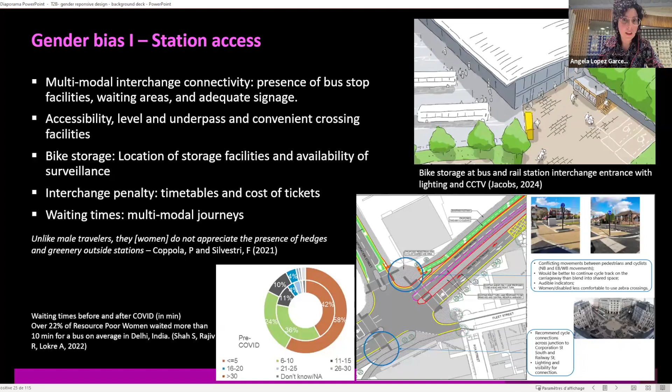Thank you, Sherin, and thank you for sharing those best practice examples. I think many of the principles will also apply inside the stations. If we go to the next slide.

So when we design stations, what we want to do is accommodate or provide enough capacity for all the passengers using the railway, and achieve efficient movement to and from trains. In concourse areas particularly, there are pressures on the space, some related to generating revenue through retail and advertising space, others through protecting revenue for train operating companies using automatic ticket gates, again taking space from passengers. This usually results in waiting areas that tend to be or could be crowded. As we said in the introduction, women experience crowding a little differently from men.

And some of the gender biases that I observed on concourse areas are precisely related to the fact that they can be crowded. To the level of comforts or the level of tolerance to crowding, we need to also add that navigating the space and wayfinding in crowded conditions is more challenging for shorter people. So again, this is a gender bias that we are perpetuating to our designs. By squeezing people into confined waiting areas, we might be marginally impacting women more negatively.

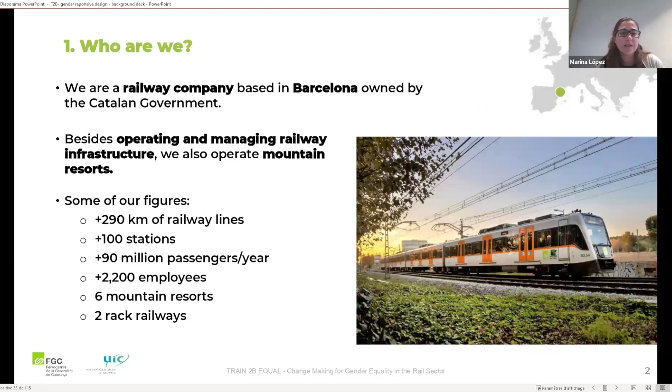I will explain a gender audit recommendation that we had in 2019. It is about security perception and recommendations for women in transport. I'm from FGC, a railway company based in Barcelona, owned by the Catalan government. We manage railway infrastructure and also mountain resorts.

We did this security audit with a gender perspective. It consisted of observations at 4 stations, 62 hours of observation, including weekdays and weekends, and all times of day: morning, afternoon, and night, covering surroundings and inside the stations. From this observation, we got recommendations based on 6 principles that I will now explain.

The first principle is about signage environment: know where you are and know where you go. This includes improvement of intermodal signaling inside and outside the stations, and also where the bike parks are, including TV information panels about other companies' transport, so you can know about all the surrounding information, not only FGC.

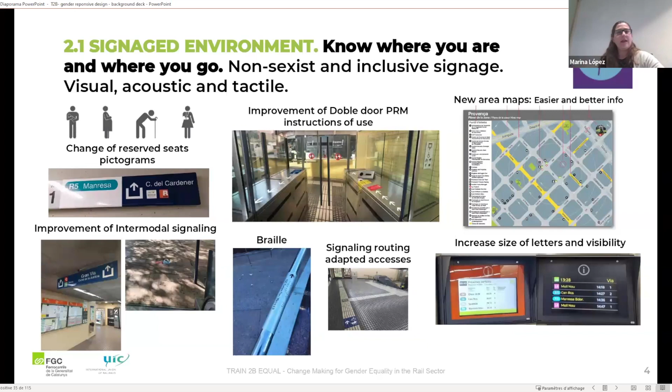The second principle is about visible environment: see and be seen. To achieve this, we need open spaces with high visibility, so you can see all the people in the station, all the equipment, and all the access points and exits. This requires transparent materials, avoiding obstacles, and reducing corners. If you cannot do this, you can put mirrors so you can see other places in the station. It's also about improving the lighting and achieving homogeneous illumination.

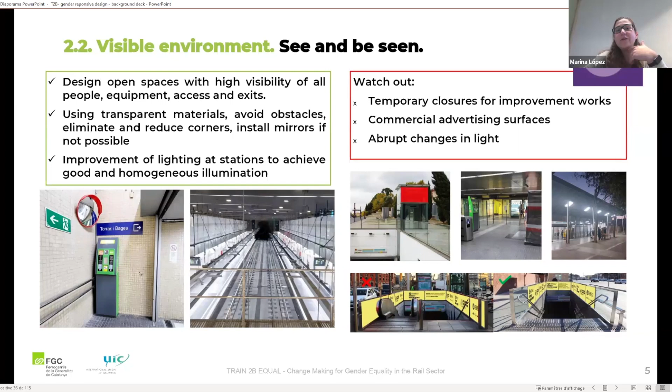Also in the stairs, you can see in the photo below — it's all about how you can make your decision. If I have transparent material and I'm in the hall and I see on the information panel that my train will pass in 10 minutes, and I see that on the platform there is only a group of men, I can choose to stay in the hall and go down later, or choose to stay on the platform. But it's my decision, so it's safer for me based on the information I have.

The third point is about a guarded environment, about formal and informal guarding, and about how I can access help or be able to escape if I'm not comfortable.

The first point was that our information points weren't visible enough, so we have a new design. Now in all points of the station, you can see them.

And from this audit, we know that it's better to train staff with gender perspective, also the security workers, because we always train our staff, but security workers were not so sensitive to this point, and now we have trained them and now they are better.

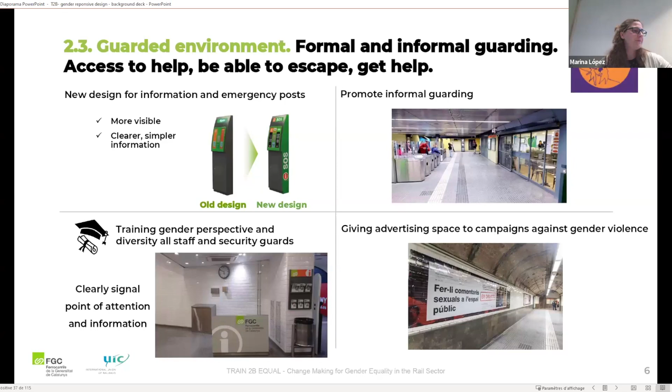The next point is about equipment. If you have more equipment, more accessible and clean and well maintained, it increases users. And if it increases users, it increases safety perception for women.

For example, we have put an auto opening button in the water closet, so they are autonomous to enter, and it is fully equipped and inclusive, unisex. It's not only for women to change the baby, all society can change the baby.

So it's important to put this in the station, to put in the mind of the society that it is not only for women.

Also double height handrails, so all people can use them. And an important thing that we didn't mind about before is that benches would be better if they have armrests, so all people can stand up easily and autonomously.

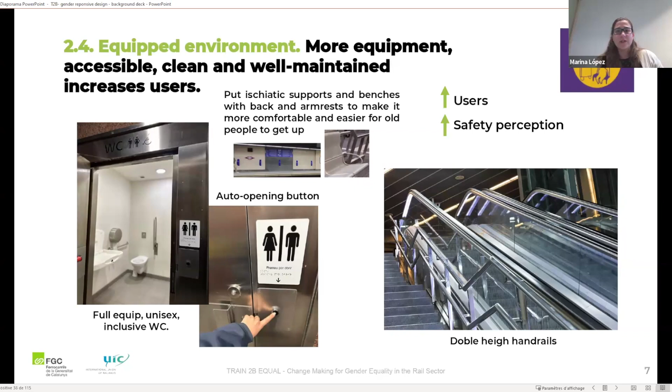The 2 last ones are together because both are of the same importance, they are always together. It's about listen and be heard. If I go to a crowded place or a place with more people, not only me, if I need something, I will be listened to. I will be heard.

So promote vital spaces with people and space appropriation. It would increment the vitality, and it would increment the access to help. So it would increment the safety perception of women.

And we have expositions in the hall of the stations. Also another important thing is giving advertising space to civic awareness campaigns, so it will promote special space care and space appropriation. So more vitality, more people, more help, more safety perception.

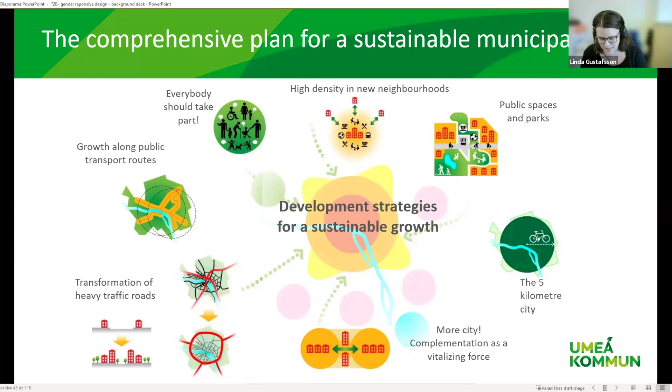I wanted to start with this one though, since I work for the municipality, and from the standpoint of the city, these are the development strategies for the city of Umeå, and one of them up in the left corner says that everyone should take part, and then continues that gender equality should be part of all urban planning. So that's also one of the starting points when working with gender equality in relation to urban planning and public space. I think that I will dive straight into the practical examples, so you can take the next slide.

I also want to mention the data sets we focus on when we talk about public space and station buildings, in this case in the city of Umeå. We have data sets on the gender segregated labor market, travel habit surveys, and also data on feelings of unsafety in public space.

We know that the hospital is a workplace that employs a large amount of women. And we know that in Umeå women travel more sustainably than men, so they use public transportation, and they also ride their bikes and walk to quite a high extent.

When this was to be built, there was dialogue, and I think that dialogue and citizen participation is key in talking about these types of constructions and buildings.

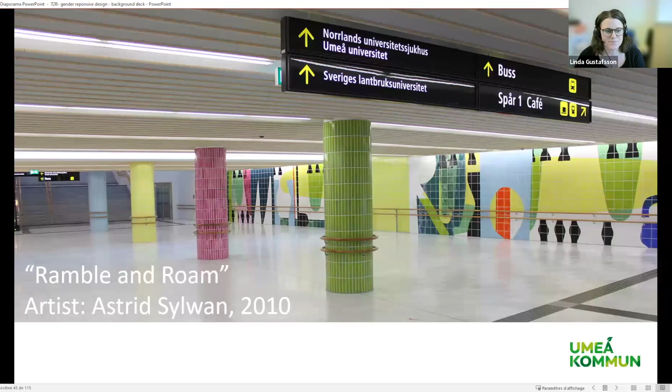So that was my first example, and we can move on to the next one, which is the passage under the Umeå Central Railway Station.

This was commissioned by the City of Umeå together with the Swedish Transport Administration Agency, and this was built in 2012. When this was to be built, there were all sorts of stakeholders involved in this process.

They did workshops together and a study visit where they walked through different tunnels to assess what makes it feel more safe, what makes it feel less safe, what makes it feel more or less accessible. So it was the actual building of the passage or tunnel, but also the surrounding areas, greenery, lighting, housing, how close or far away they are, and how that makes us feel.

We also received funding from the Swedish National Board of Housing, Building and Planning to improve our methods for working with gender equality in this type of construction.

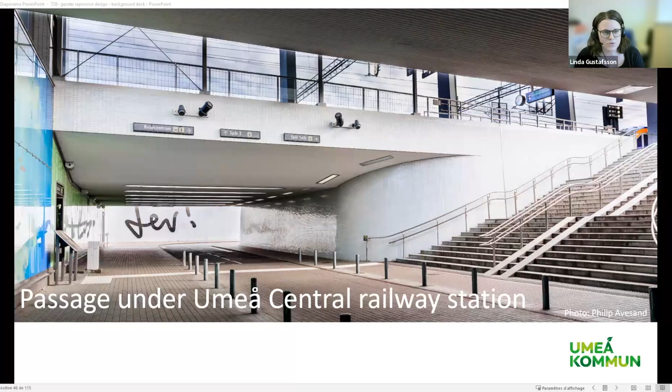We can go to the next slide to showcase what was actually made or integrated into the building process after this workshop and common learning between the different stakeholders. And I think if you click one more time.

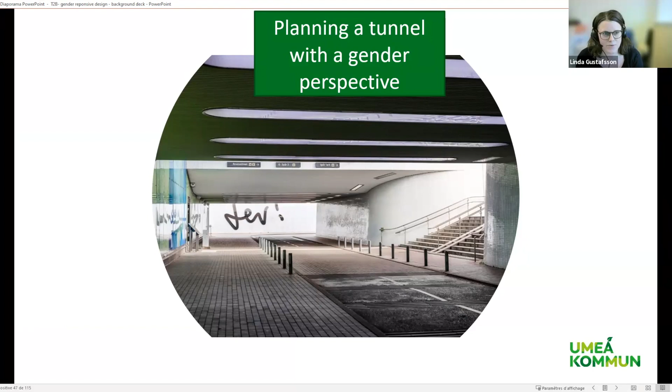So this is one of the things: the lighting in the roof is artificial lighting, but there was an ambition to make it resemble daylight as much as possible. And on the right, you can see an exit in the middle of the tunnel, which is also there to allow daylight, but also to have an extra exit.

This wasn't planned from the beginning. It was added when working actively with gender equality, so that you would have a way out of the passage if it started to feel, for some reason, unsafe. The passage is quite broad, but it's not as wide as you might think.

I think it's 9 or 10 meters, and there are designated lines for bikers and walkers. All the corners in this passage are rounded, so there are no sharp corners, and that's also to avoid the feeling that someone might be hiding, or that you don't have full visibility when you go through it.

There are no pillars in the middle, for example. I think this is important to remember when working with gender equality in these types of constructions: it's also the choices not made—that you decide not to have pillars, that you decide not to have something. It's not only what's added, it's what's not added, so to say.

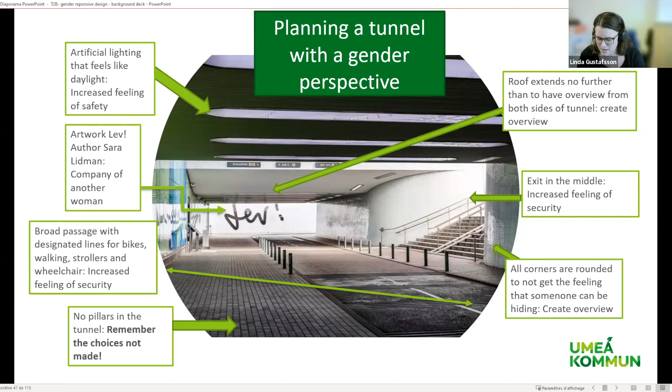But then another important thing, I think, in this particular example—if you go to the next slide—is the artwork in the passage. You saw some of it on the previous slide, where you saw a quote that says 'lev' with an exclamation point, meaning 'live' in Swedish. That's part of the artwork, a 170-meter-long glass artwork made of quotes picked by the citizens of Umeå from an author called Sara Lidman.

She is from the county of Västerbotten, which Umeå is in. The artwork is both light and sound and quotes, and the quotes were picked by citizens of Umeå, picking their favorite quotes from her books and voting. Having this interaction and participation, I think, is important because it creates a feeling of belonging—this is a passage or tunnel that belongs to the citizens of Umeå, who have been part of creating it.

So you also have the company of another woman, even though she's not in physical form—she's in the form of quotes, and her voice that you can listen to. I think that also increases the feeling of safety when you pass through it.

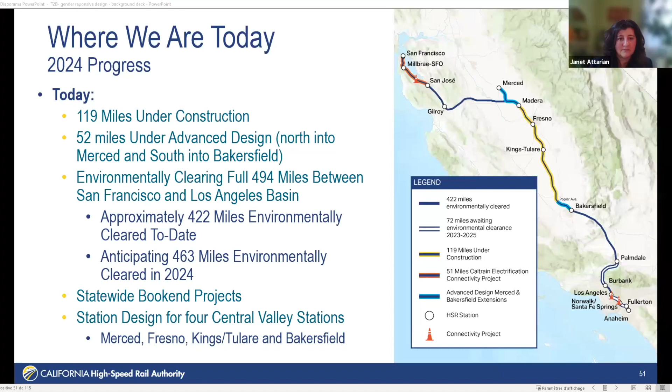In doing all of this work, we are producing a lot of jobs in the construction and design industry right now. This is really important, and one of the reasons the project is starting in the Central Valley is because we wanted to make sure this project was improving the lives of Californians and providing jobs to the community. There's been a big focus on hiring local folks, particularly small businesses, and I'll talk about how that's affecting women in particular.

There's a real emphasis on how this project will achieve California's overall sustainability goals, and there are some very aggressive sustainability goals on this project, which I'm going to talk about a little later in terms of how that translates into supporting women.

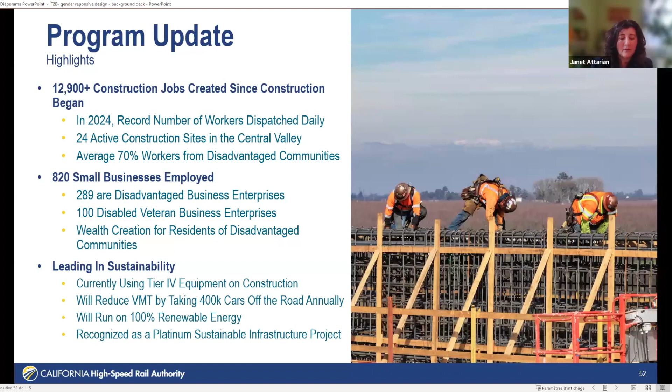As I mentioned, we are starting with the design of these 4 stations. There is work going on in some stations outside of this area, but they are still a little ways off. We hope to have this first 171 miles up and running by 2030, so we are actively working on the design of these stations so they can get built in time for this section of the system to be up and running.

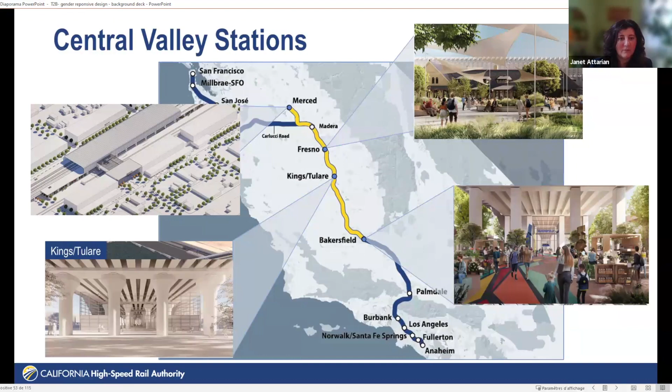I'm going to dial in now on what we're doing when we're in the planning and design stage of this whole system from scratch, which is a unique opportunity, and how we're thinking about gender inclusive design from the beginning, and how this kind of project can improve the quality of life for women. I already mentioned job opportunities, obviously how we're designing with gender inclusivity in mind with specifics around the train and stations themselves, and also how we're thinking about the importance of not just the station, but the community that station is in, and how these things come together.

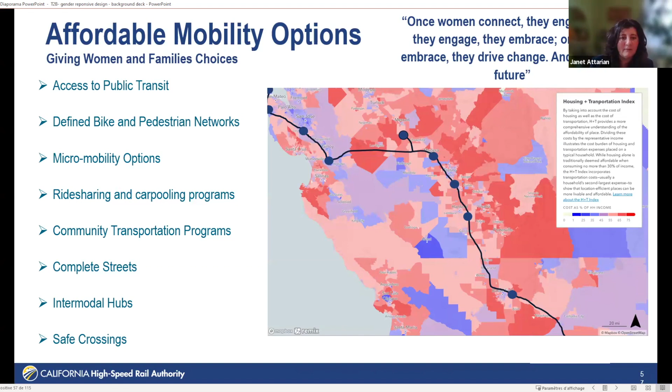The other thing that's really important is that we are still in the design and planning stages of this system. The first part will hopefully be open around 2030. But there's a lot of efforts going on right now that are impacting riders and women in the system and in the state of California, even before the larger high-speed rail system is up and running.

In the Valley, we are really working with all of the transit providers. High-speed rail is becoming the new backbone for a real overhaul of California's public transit system, bringing it into the 21st century. The authority is helping electrify bus fleets. There's new and revised train service being developed to tie into all these stations. Every station is getting some form of new transit hub.

There's EV bus charging and vehicle charging being integrated throughout the system. Many of these projects are already underway or getting started and will be up and running before high-speed rail. There are also big efforts in the northern and southern pieces, electrifying existing track systems that high-speed rail will come in on, and addressing blockages that happen now, so the whole system can really function when high-speed rail comes on. This has been really exciting, and something a lot of people from the outside don't always understand: high-speed rail in California is so much more than just the train system. It's really a rethinking of public transit and getting to those seamless interconnections, which are so important to women.

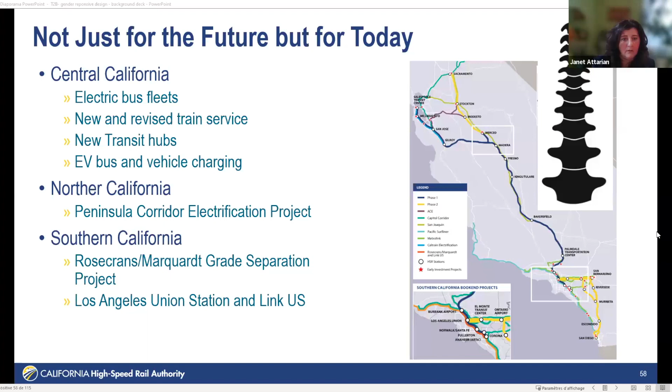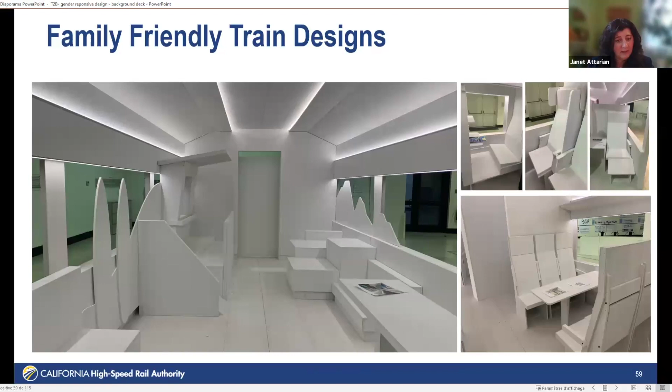We're also looking at a range of seat types, from some very private cubicles to more typical seating. The width gives us the ability to create pods so that larger family groups can sit together. Having that range of options is really important to women, whether they're a single woman alone who wants a little bit of privacy, or a woman traveling with a large family needing to keep everyone close.

And then the designs of the stations themselves - there's a lot of really key things that we're looking at. Having our entrances very visible, making vertical circulation very visible with exterior stairs and escalators. When we're looking at platform designs, really minimizing intrusion, so there's clear sight lines, you can see who's on that platform. There aren't hidden corners. Wraparound services, creating retail forecourts and multimodal connections.

In the case of the Fresno station, that vertical circulation you're seeing not only leads you to the station, but it is a continuous bridge across the station that actually connects communities separated by the railroad tracks. Again, really important for women, that they don't have to go around a long way or under the underpasses to get from one side to the other. There's a well lit, well secured circulation path which everyone needs to move through, whether you're going into the station or just crossing over to the other side of the community.

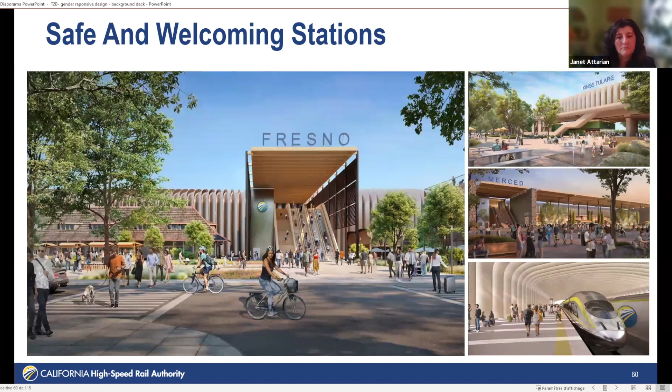Smith Group did a study where we really tried to understand what people were looking for in gender inclusive restroom design, lactation facilities, and did a lot of work interviewing people and doing surveys to understand what they were looking for. There were four key things that came up that we're working to apply not only to restroom design, but throughout the design.

None of these are surprises - we've heard a lot of this earlier today. Easy to find and navigate, right? It's got to be clear and super intuitive, and the layouts have to feel really welcoming. The ergonomic side prioritizes well-being, accessibility and convenience. It goes beyond just, can I find it? But when I get there, are things arranged in a way that really supports the needs?

And then the cultural aspect is really important - how is it fostering a sense of belonging and respect? That really makes a difference, when the design is telling you that you are respected, you're going to feel much more comfortable and much more welcomed. And then, of course, access - really preventing spaces that feel exclusive, and making sure we're focused on how we're providing safety.

Next slide. So how does this translate in what we're doing in terms of design?

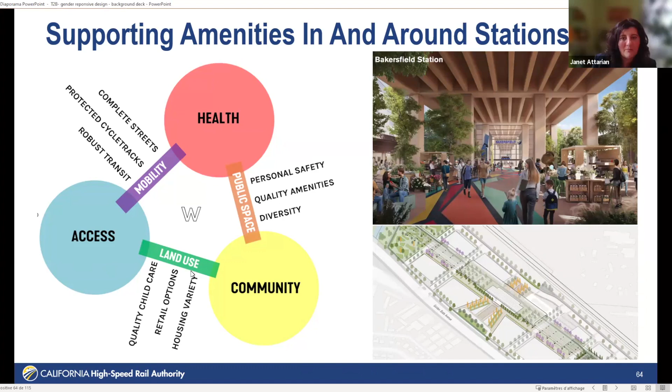Yes, here we go. So the final thing I want to talk about is that we're also harkening back to those sustainability goals. These stations are going to be so much more than just a place you come to get on and off the train—they are also resiliency hubs for the community.

The entire high-speed rail system will be electric. It will all be green power, and it will be locally generated. As part of the build-out of the system, we're building PV fields all along the system, which will feed not only the track and train system, but the stations themselves. This allows for a lot of resiliency—these stations should be able to operate even in times of crisis when the grid goes down.

California is subject to wildfires, earthquakes, and tremendous heat stress in the valley in particular. So they can serve as cooling stations, refuge areas, and provide power even when the larger systems may be down. Another important part of this is they can provide community connections and access to services in times of need.

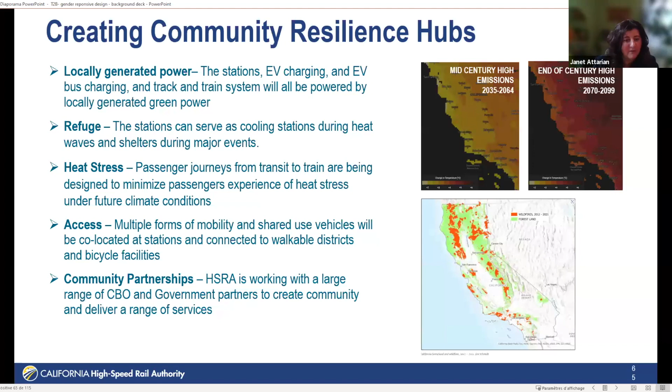One of the ways the authority is really doing this, not only to help with this community and long-term resiliency, but also in the immediate design of the station, is by partnering with local community-based organizations.

Recently we had a series of public engagement meetings with community organizations throughout the valley—one for every station area we're building. We met with hundreds of CBOs and asked how they see partnering with high-speed rail, and what they're interested in bringing to their community to reflect its needs.

Even before the stations are built, we're doing what we call early partnerships. In Fresno, we're building a public plaza, restoring the historic station that was there, and building a multimodal hub with a lot of EV charging. There's a whole series of partnerships, from tree planting to food markets to murals, all being done with high-speed rail.

This is really building partnerships with the community that will not only make successful stations, but bring supportive services that are so important to women, and hopefully make people feel more comfortable using these stations and getting used to coming to these spaces well before the stations themselves are open.

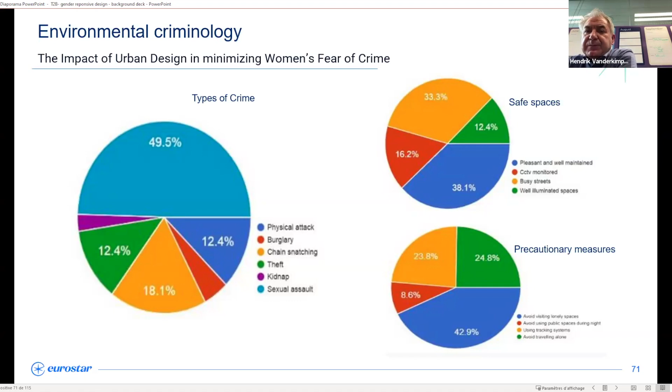Concerning design, I saw already in a lot of presentations before that environmental criminology has also been used to deal with approaches for railway systems and urban public transport systems, introducing CPTED - crime prevention through environmental design - into the approach of building stations, the environmental approach, etc.

Professor Cozens is one of the people dealing with this since 2008, though I think since the 90s, but in 2008 we had the first approach for public spaces, in which we can define CPTED as identifying conditions of the physical and social environment that provide opportunities for criminality, and then modifying those conditions in order to reduce the opportunities.

It's very important that we try to mitigate the possibility of increasing crime, or conditions of physical assault, opportunities for criminality such as vandalism and theft, by mitigating these criminal facts together with approaching the environmental aspects of buildings, stations, trains, and so on, as I saw in several approaches today.

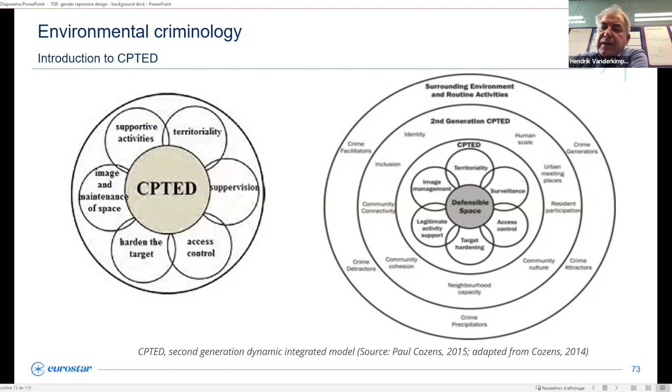We started in the 70s with CPTED on territoriality, access control, and supervision - a very hard way to deal with it. In the second generation of CPTED, there was already an aspect of community, an aspect of human scale, and so on, leading to today. The first generation covered territoriality, natural surveillance, image and milieu, and access control. I find a lot of examples in the Belgian railways.

Maybe you can go on.

We have to define and limit in time and space that public spaces are clear for everyone. Everyone should know that they are in a public space or public environment, such as public transport, and that intruders can easily be identified.

That's why in Belgium we have a free number for appealing to Securail, not the police, but Securail, so that every time there is a problem with incivilities, people can intervene as soon as possible.

We also need supervision, and the best practices are the presence and visibility of staff and CCTV. Women and men and other people should know that they can always be helped and seconded by security staff. Okay, next slide please.

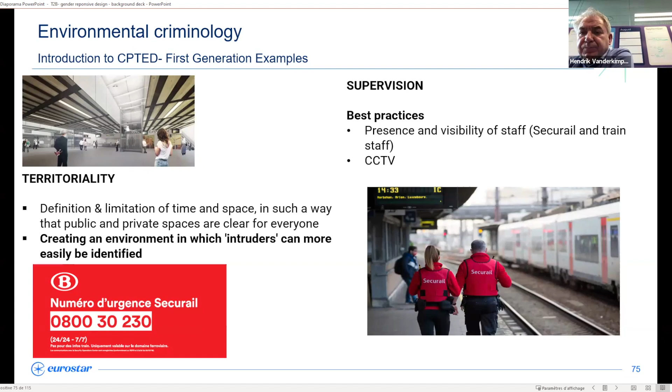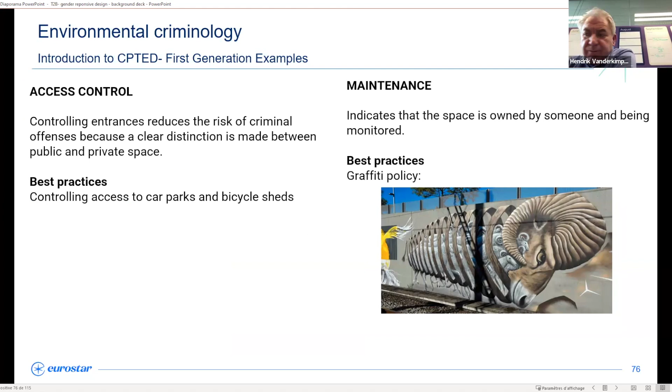For the access control, you can see that the entrances of bike parks and car parks should be controlled so that they reduce the risk of criminal offenses.

Here again, there is a clear distinction between public and private space. Maintenance is the fourth example aspect of CPTED first generation: to tell everybody using the public space that the public space is being monitored.

For example, we use an art graffiti policy, not a policy where everybody can put graffiti on our walls and stations, but we use very good artists to create art graffiti projects in a lot of stations in Belgium.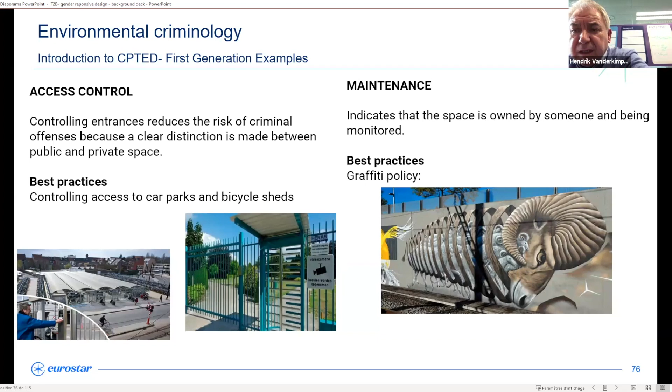Next slide please. Supportive activities, of course, like live performances in the stations, as we saw already in, I think it was Barcelona. The piano is there again.

I saw the same examples in one of the first presentations this afternoon, about studying the wider embedding of station buildings in the environment, and also the accessibility of the stations into the urban space.

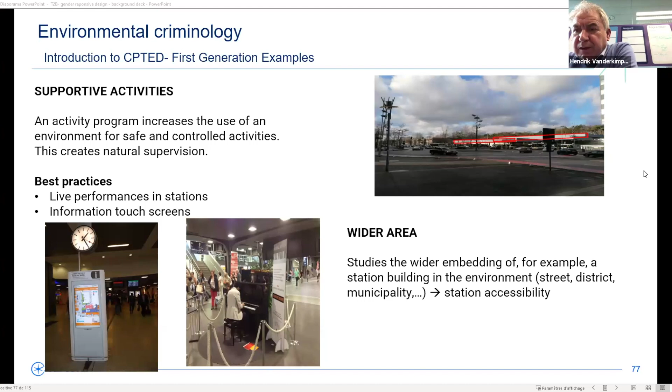Next slide. Just be careful, Hendrik, because we have a limited time now. Yeah, I think there are a few slides left. I will pause this one. Thank you. This one, yeah, can pass.

This one too. For the second generation, maybe that's important, because I heard also from our colleagues that social cohesion is very important within a community, and public transport should also be considered a community in which people of different cultures and backgrounds come together with different objectives - taking a train, taking a bus, but also coming to the shops and the station.

There also should be community connectivity, which is very important. As we see, for example, the last example in 2024 with a big problem around and in the station of Brussels Midi, there was a collaboration between police forces, social forces, social environmental organizations, and the railways together to approach the station, because we cannot do it ourselves. So we need this community connectivity.

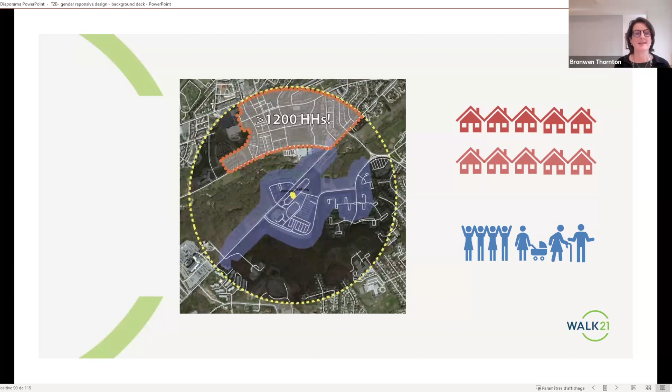Next one, please. So I want to talk a little bit, we've heard a lot about women's experience. We've just done this fantastic project in Milan called Step Up. It's a really great little brochure and a great project. I'm really sorry I haven't put the web address there, but you can look it up online, understanding how women feel walking in Milan.

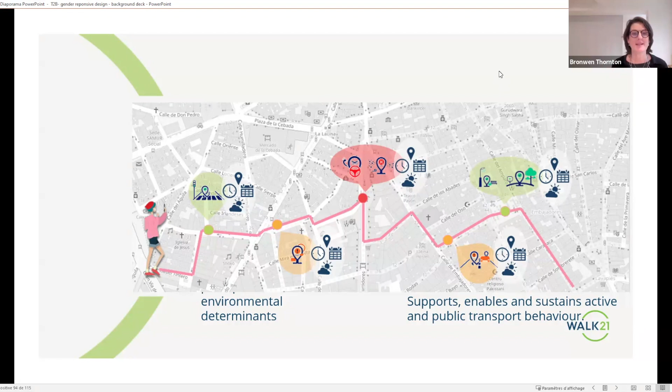Next slide, please. So this is a really quick summary of what the app does. I've mentioned most of those things, but the importance is that it's like a satisfaction survey from your walkers, but incorporating that catchment journey to the station. And it allows you to establish a baseline and then go back and measure the impact and evaluate those improvements.

We saw that in the chat earlier in this conversation, people asking, how do you know if it's worked? How do you know if it's made a difference? Do women feel better about it? This app can help you do that, because that's exactly what it's doing, not just measuring the environmental changes, but

the impact on how women feel and how comfortable they are. Next slide, please. And that brings me to my final slide, which is to invite you to join us in Lisbon to continue talking about people, about public space, about gender, and about access to trains, rails, buses, the whole entire journey, and how walkability is part of that conversation.

We're in Lisbon in October, but abstracts close next week. So please do join the conversation about making our cities more walkable, more connected, and more attractive for women to spend time on foot in public space.

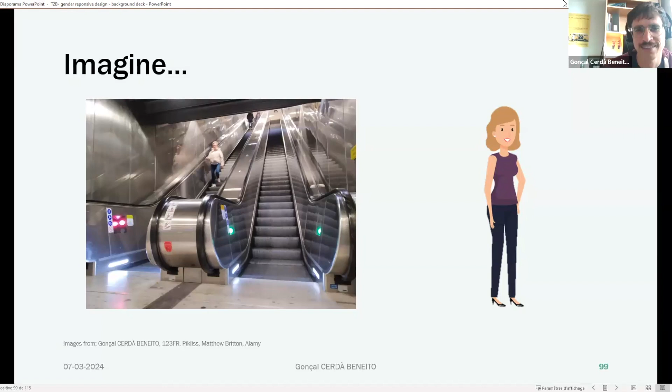So she's a single mother living in a big metropolis and working as an office assistant. Imagine her coming back from work with her bag and a working bag, because tomorrow she's working from home in order to bring her young son to the psychomotor therapist and her daughter to her music lesson. She's also carrying some groceries because on the weekends she must drive her daughter to her soccer match, and it's harder and longer to shop with the youngest one.

And now, even harder, imagine that she's traveling also with both her children because they have already finished school. Not that easy to take this escalator to move in the station, right? If you can pass, please. You may think this complex case is not very common.

Nevertheless, single mothers lead an important and growing number of households in urban areas, and this category materializes gender issues. In the Paris region, single-parent households are a quarter of households with children, and single mothers are the majority of single parents. There's a weak consideration of these households, even if they manage complex daily lives.

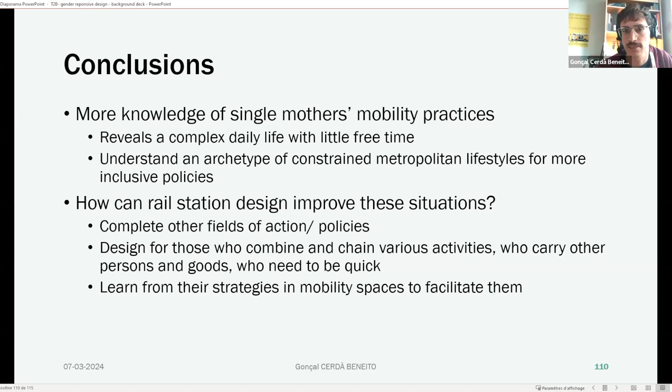Thank you. I just wanted to thank everyone who participated in this workshop, and especially everyone who presented. I feel that the topic we're talking about today, gender responsive design for railway stations and infrastructure, is extremely important, and it's linked to multiple problematics, as we saw in the presentations today.

We saw the importance of collecting related data in order to fix some KPIs or learn more about stations or other contexts, as we saw from the Magdalena case with the ITF toolkit; choosing the right design directions, as presented by Sharon and Angela; and reuniting a whole panel of different actors, which is very important as well: local or regional authorities, railway infrastructure managers or train operators, police forces, as shown by different UIC members in the second part of this workshop.

And finally, as shown in the third part of the workshop, the mobility for different categories of women, such as single mothers that we just heard about, and especially for women who choose walking instead of taking other transport like taxis—interchange and transport, or just walking directly to the station, can be quite difficult. So thank you everyone again.